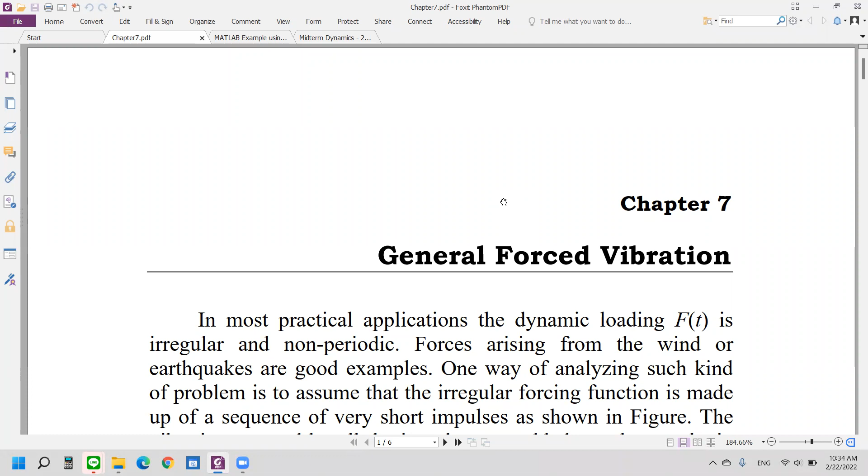You will learn with Dr. Chatpan, maybe, who uses direct integrations. They try to solve our system by assuming something, and it is more practical when engineers look at the system and say if the time delta t in this picture is delta tau, very small, they could assume the acceleration of the system is constant, or the acceleration of the structure changes in a linear behavior.

Such assumptions can be effectively implemented, and the application of direct integrations becomes much more efficient. I believe Dr. Chatpan will discuss this with you in the second part.

However, there is another way of thinking to solve this dynamic system. Many mechanical engineers, many aeronautical engineers, found something more efficient in the way they solve the system.

For example, mechanical engineers would like to know the vibration of the car or vehicle when it travels at different speeds on different surface roughness, or the irregularities of the street, road, or highway. They want to design the vehicle to have very small vibrations so the driver or passenger has a comfortable ride.

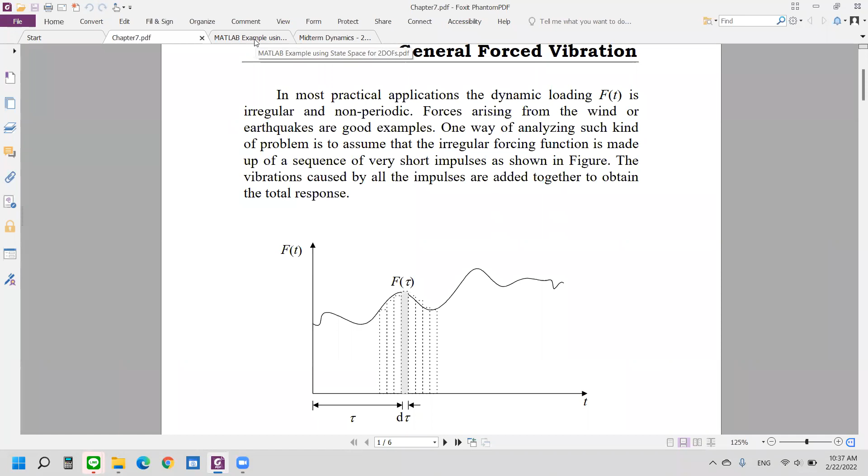And maybe this one - oh, I'm sorry, I cannot write down anything today since I have to use MATLAB, and I switched from the Surface tablet to my laptop, which makes it quite difficult to write. However, I think it's not too difficult for you to follow when I say state space.

I mean this - you can find it in the textbook, this file, by Professor Gary Hart and Professor Kevin Wong.

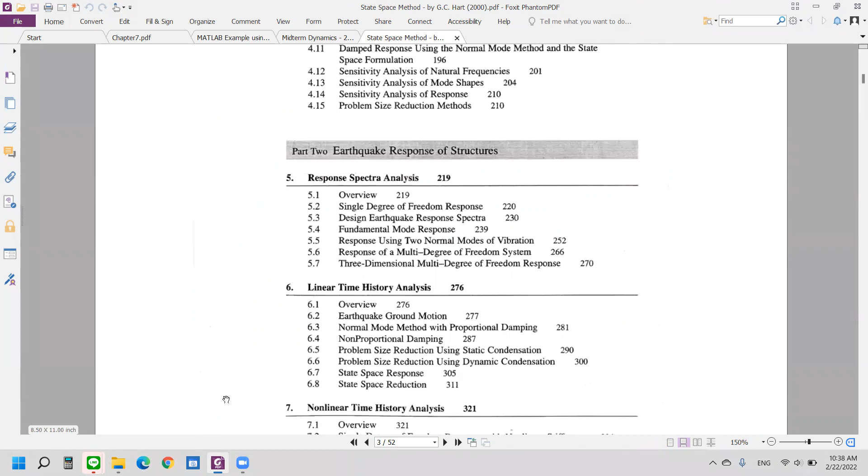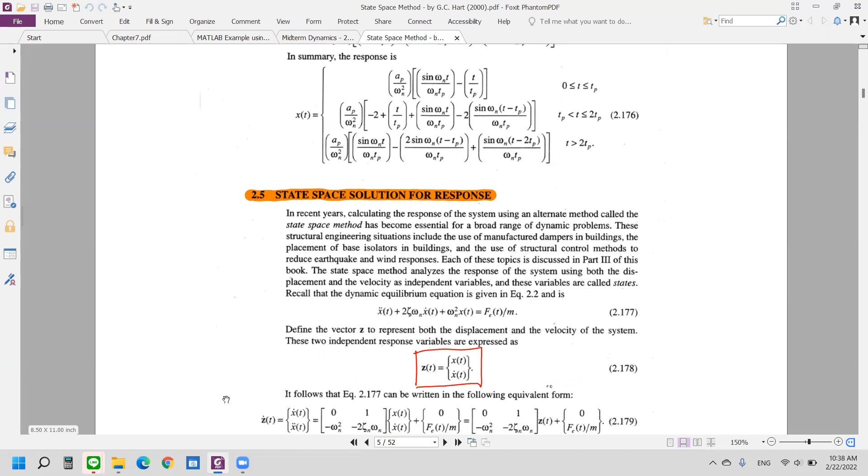The idea is the same as what's implemented in MATLAB. We try to solve the second order differential equations, and to solve them, they transform the second order differential equation into an equivalent first order differential equation.

So you see this is a single degree of freedom system here, equation 2.177. This is a single degree of freedom system. To solve this second order differential equation, they propose a new variable called z, a new vector containing x and x dot, as in equation 2.178.

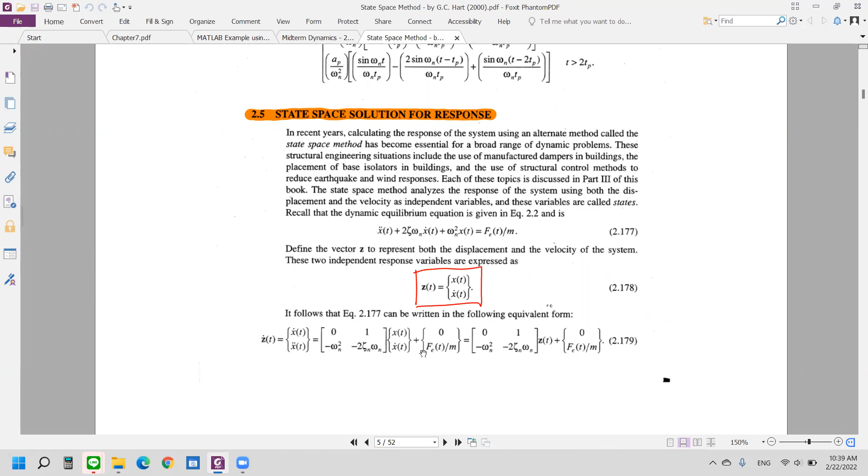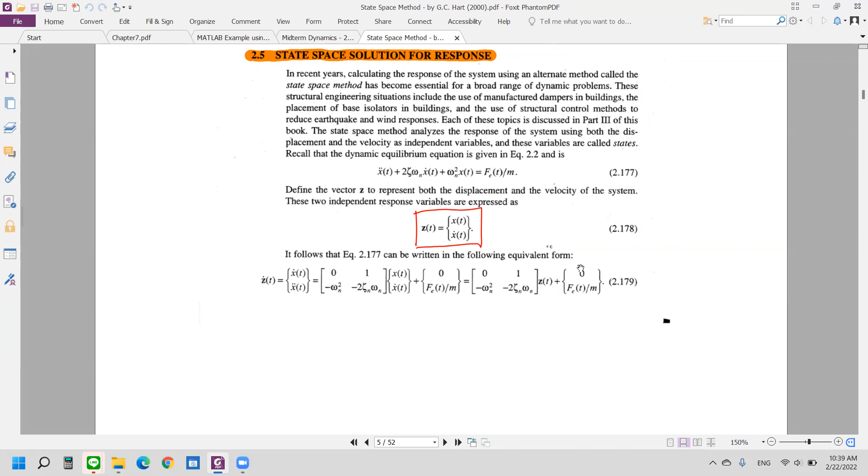Then you obtain this second order differential equation changed to the equivalent first order - it's first order because this is z dot, only one derivative on the new vector z, and on the right hand side you have a coefficient matrix multiplied with z of time t, plus the force function as in 2.179.

To solve that, they use this term - they do the integration as in equation 2.184, in which the effect of the initial condition is z0.

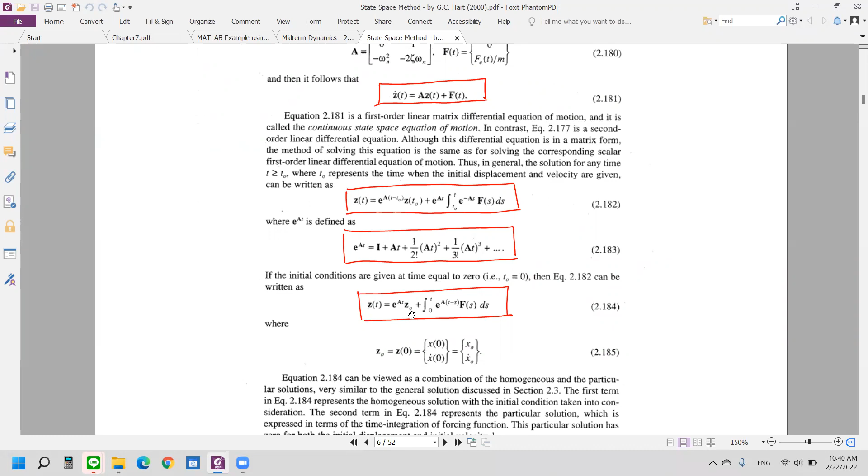Let me make it bigger. Okay, this is the initial condition contained in the vector z0. You have x dot 0 and x0 - that is the initial velocity of your system and the initial displacement of the system.

They multiply with the e to the power At. This is quite new to you, I believe. But if you look at the applied mathematics, this one is called the transition matrix.

And if I implement this in the computer programs, I can assume that the force F of s could be very small if I perform the integration. I will assume something like if the delta s is very small, the time step is very small, the force F can be treated as a constant function or just a constant quantity.

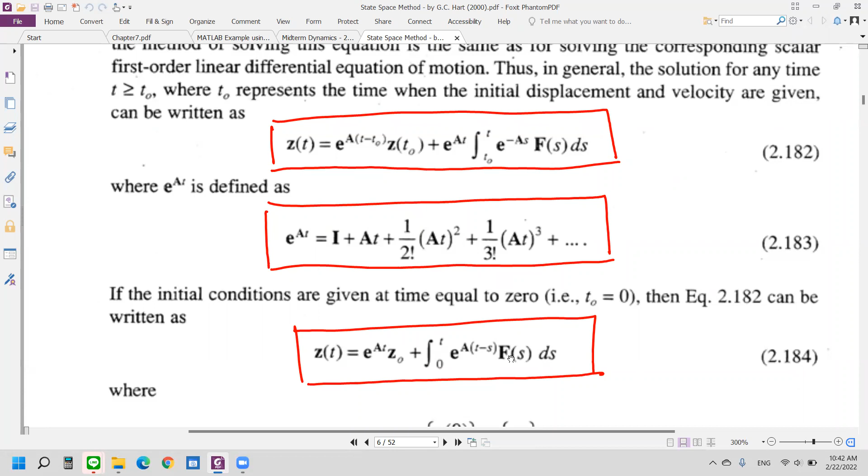So it's quite easy to perform the integration of this transition matrix only, even though the force is arbitrary. But when you perform the integrations, you can consider piecewise, you can consider each delta t of the effect of the force. So it can be assumed to be a constant force during the very small time delta t, like that.

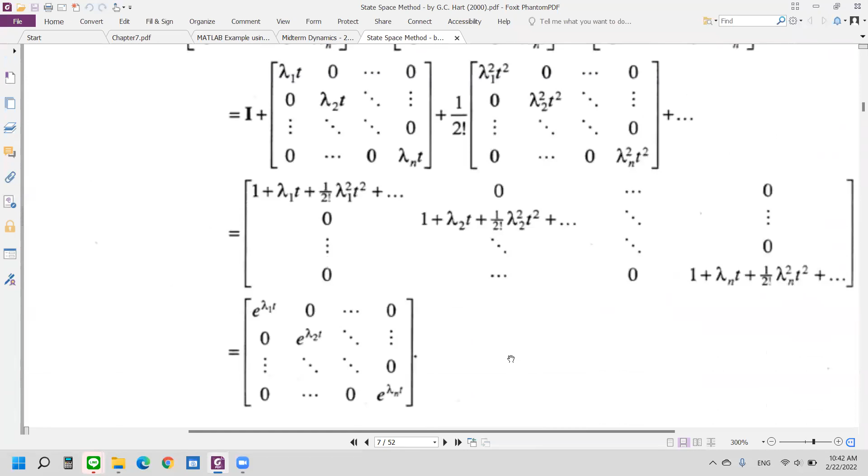Let me find a way. Okay, this is the way they compute the transition matrix. Let you, okay, maybe this one.

If you want to compute the e to the power At, what you have to do is get the eigenvalue and eigenvector of the matrix A, and the eigenvector in this textbook is a T matrix, a big T. This is an eigenvector, and the lambda here, maybe there as well, is the matrix of the eigenvalues of matrix A.

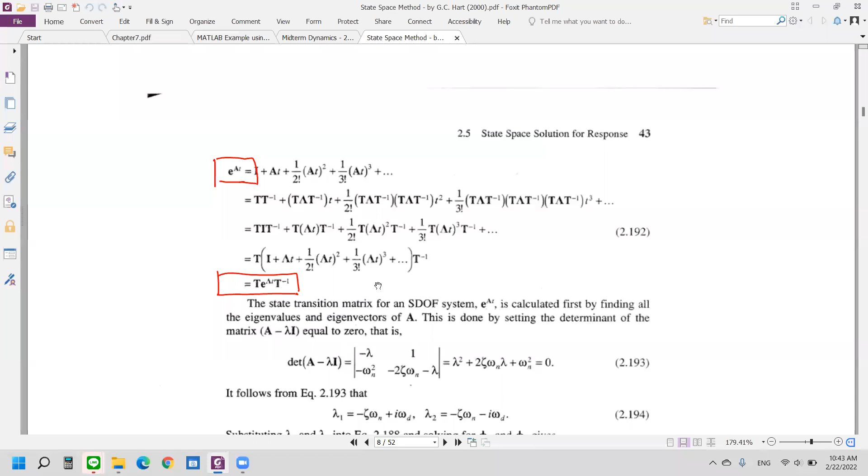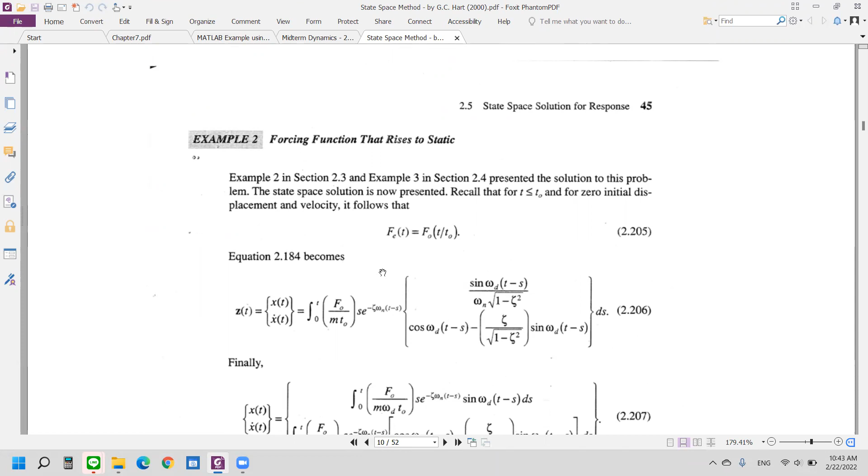And in MATLAB there is a function to get this transition matrix, very simple. I will show you later, but if you want a good background or the theoretical background of this state space, please come visit and understand through this part of the textbook. It could be very helpful.

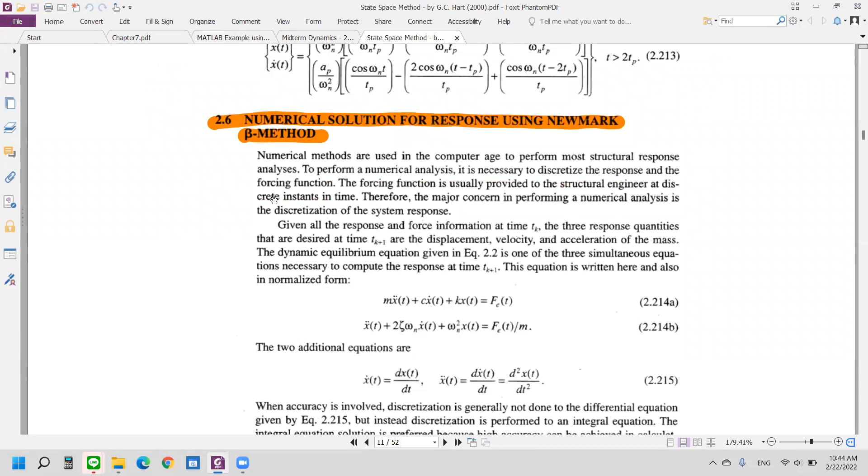Okay, this one is a Newmark beta. This is another idea that Dr. Chatpan maybe will discuss with you, so I skip it.

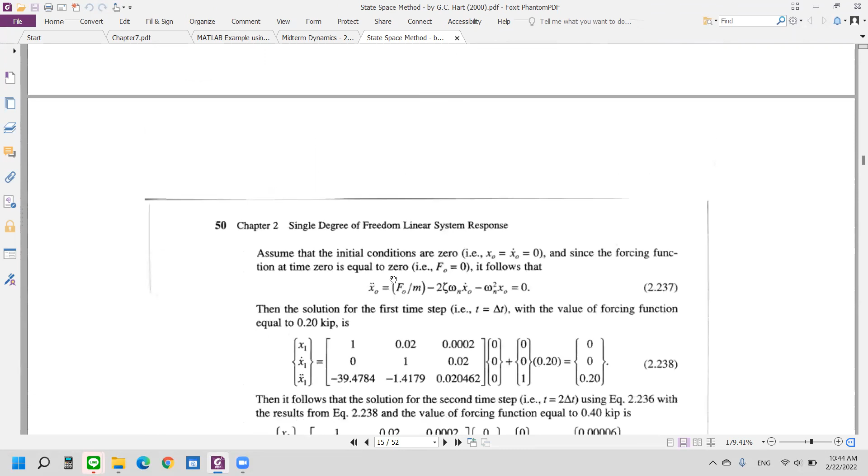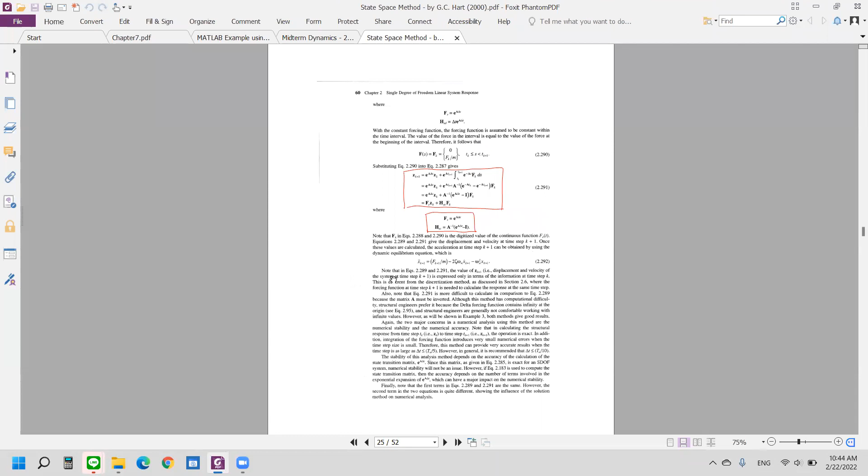It seems only the state space that I will show you today. Maybe should be. I want to find the iterations equation. Where's the iterations? Let me do this for you.

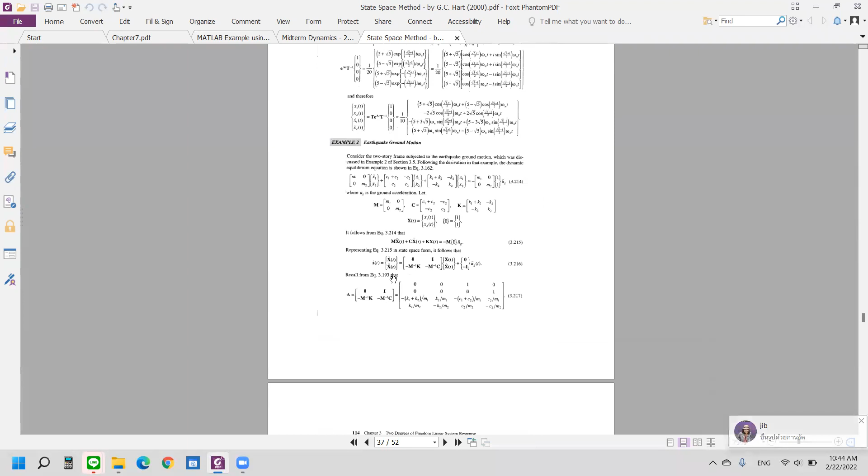Not so sure whether we have, okay, maybe here. No, it's still the integrations. Okay, this one.

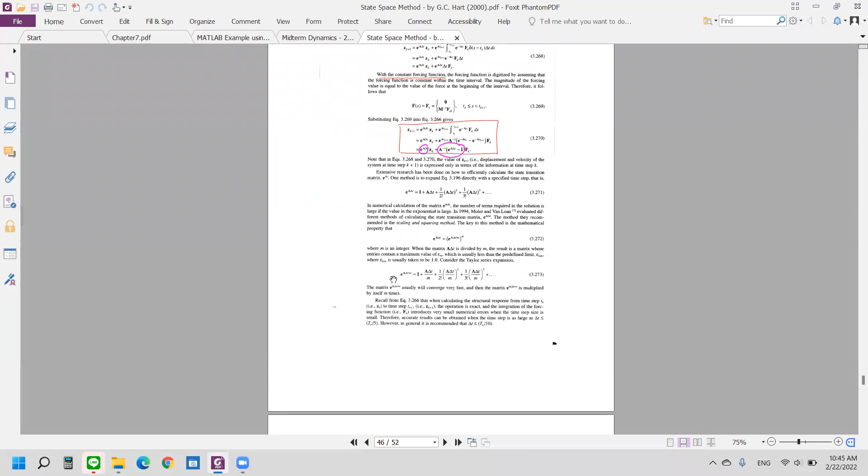The difficulty when we implement these algorithms, this equation, into the computer is that if you want to compute it at any time t, it could be better to go stepwise. You go step by step, starting from time 0 and go to time t equal to delta t.

Go to time t equal to 2 delta t. Step 3 is 3 delta t. Step 4 is 4 multiplied with delta t, something like that. And the efficiency of the computations will come if I can make use of the previous information. For example, to compute step number 4, if I can use the result from step number 3, it could be very helpful, right? It can help me shorten the computational time I need, because only small additional information is required.

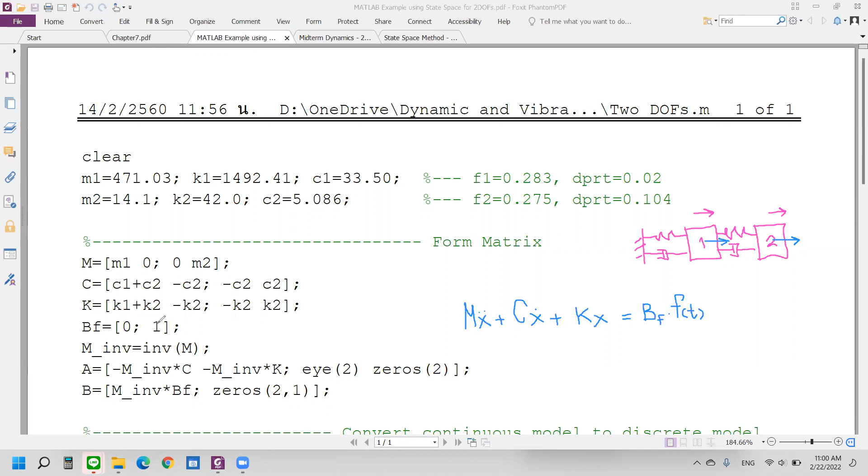In this example, let me do it like this for simplicity. Then I do the inverse of the mass.

And this is the A matrix, right? When you write down the state space, it's something like this. You can think about the state space in which if I write down the new variable Z dot, it could be something like this.

And the Z contained inside is what? It's X and X dot, right? This one, I believe you can remember, is called M inverse, M inverse, and then matrix C, something like this.

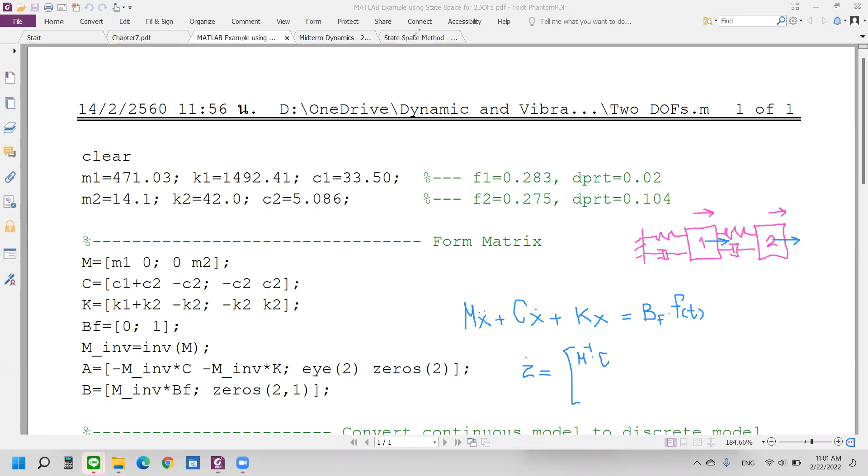Let me go back a little bit to when we do the equations of motion, okay, you can have this. It's going to be something like Z dot equal to, but in my case I use the velocity and the displacement. In this example, they use a displacement vector followed by the velocity vector, so it becomes a little bit different, right? In my case, I use X dot first and come after with the X vector.

So the matrix here could be minus M inverse C here, and I would get I there, and at this position it's 0, and at this one could be something like minus M inverse K, right? So the position of the elements of matrix A could be different between this textbook and my example. Sorry, it could be M inverse C, M inverse K, the I is I, this one is I, and 0. Okay, and then this one, this is the state space.

When I tell MATLAB about the delta t, then use this function c2d. But remember, if you want to use this function c2d in your MATLAB program, you need to have what they call the Control System Toolbox. Without installing the Control System Toolbox, you cannot have this function c2d.

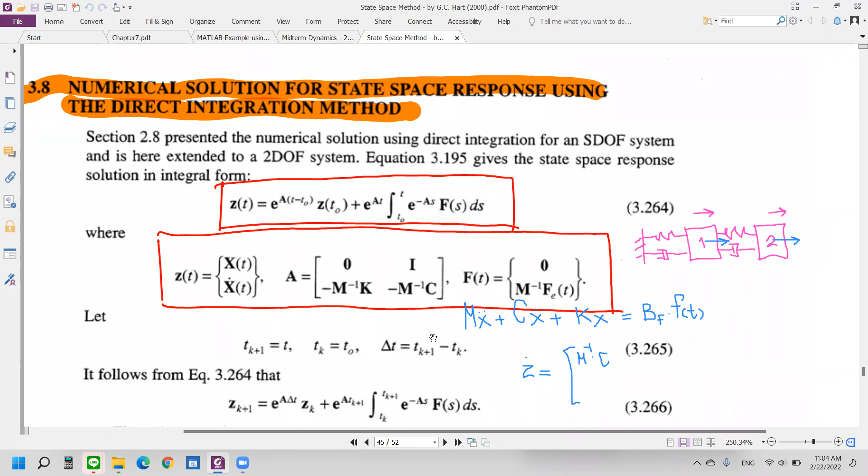To solve this equation, I need this transition matrix. Now it will be the matrix A sub D, and this one is going to be B sub D of mine. So A discrete and B discrete.

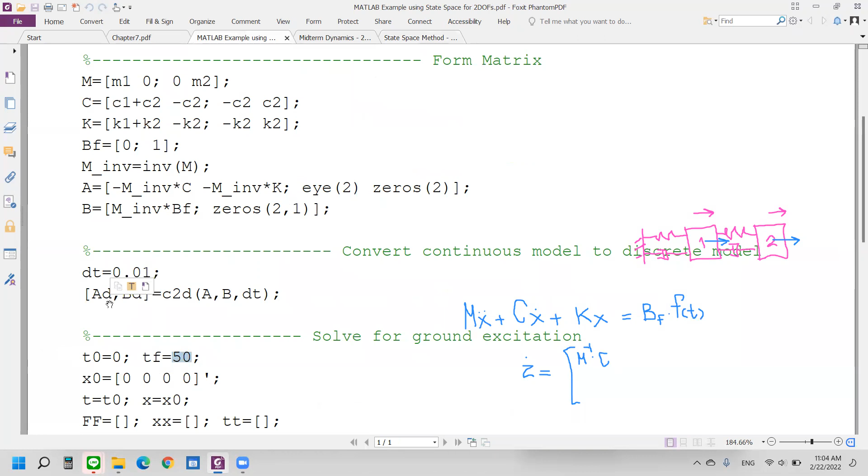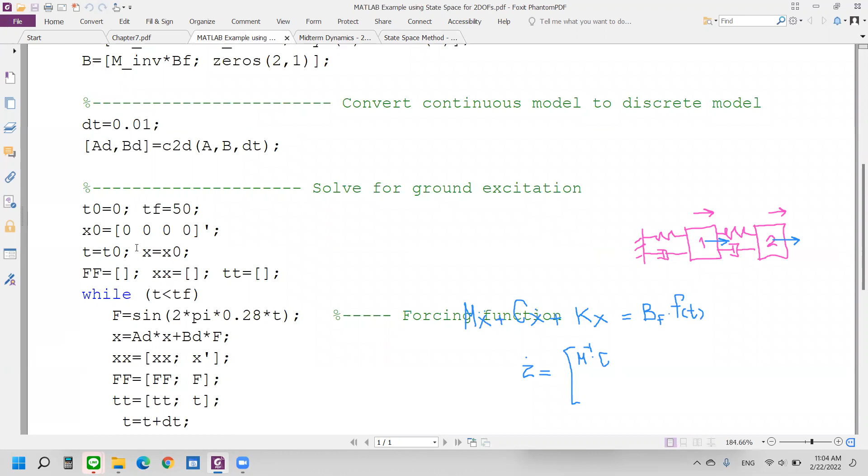So I have this AD and BD. I will solve from time 0 to 50 seconds and assume the initial conditions of my building are 0, 0, 0, 0 - no initial conditions, right? And this is just the vector that I want to use to store the result. This is the force vector.

My force, F, is a sine function. So it looks like I apply the force as 2 pi times 0.28t. The frequency is 0.28 hertz on the building, but only at the second degree of freedom. Remember, coming back to here, since the BF, we put 1 only at the second degree of freedom.

And then this is just the multiplications. To get the solution is very simple: I put AD multiplied with X, and BD multiplied with F. This is a time loop, a while loop.

In each loop, the time t is defined, and delta t is very small, defined as 0.01. So I will compute at each step of time, starting from time equal to 0, and increase by 0.01 at each step. Then I compute the present force and predict the future one step ahead using this equation. After I obtain X, I will use X to augment it into the total solution XX.

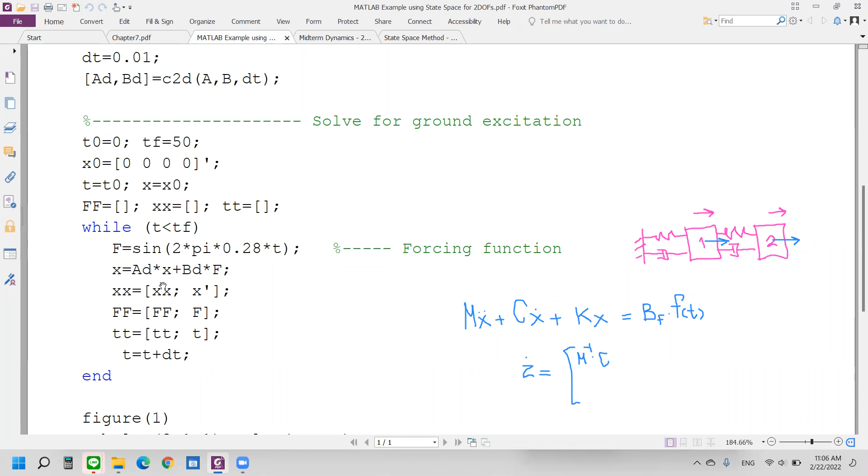And this is about the force - I will store X, and I will store the output of the force and the time t like this. Then I increase the time to the next step, t equal to t plus delta t. I continue this loop until t equals tf, and then my computation exits the while loop.

And I plot for you the force function, the loop, and the force displacement. So this is the main computation - this equation, X equal to AD multiplied with X, and BD multiplied with F.

At each step, the X will be the present information about X, right? Will be put here, and then I will replace it with the new X for the next step. I will store X there, keep going like this. And this equation is exactly the same as this equation.

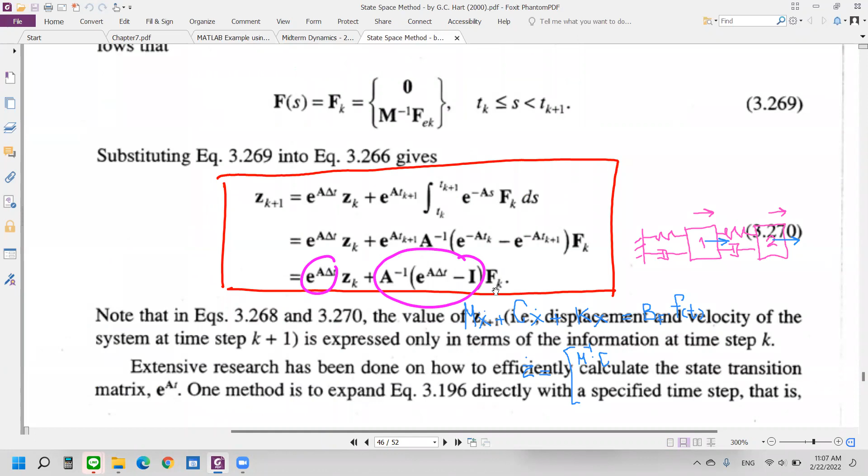ZK plus 1 equal to AD multiplied with X, plus b sub d multiplied with f - exactly the same equations. Let me do this for you in MATLAB, very short time I think.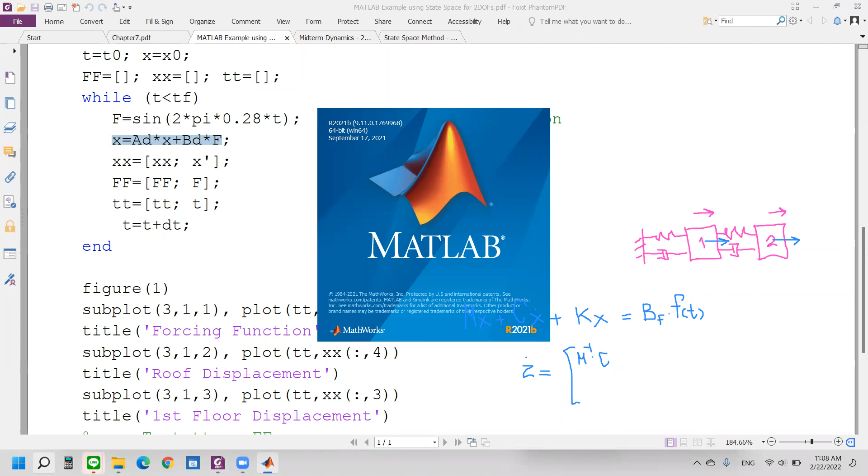Let me start MATLAB first. I have to test the program. It will take a few seconds to load the MATLAB program. Sorry for the time.

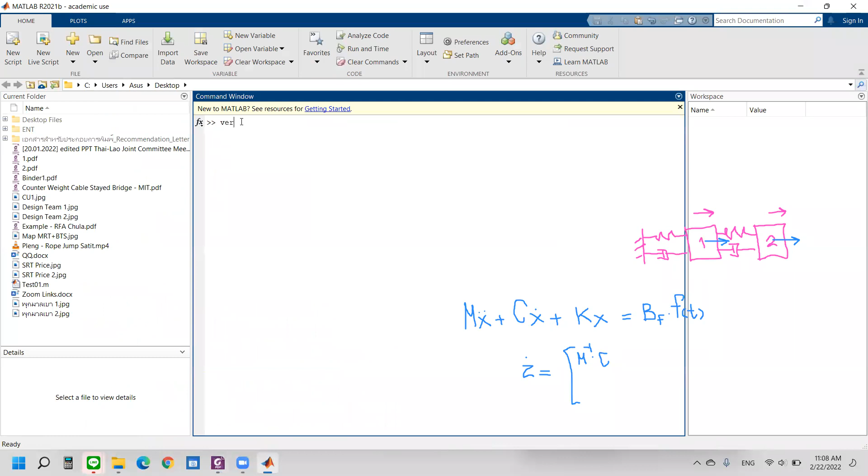Let me see the version I have. Signal processing - okay, this one, you need this. If you want to call the function C2D, you need this signal processing toolbox.

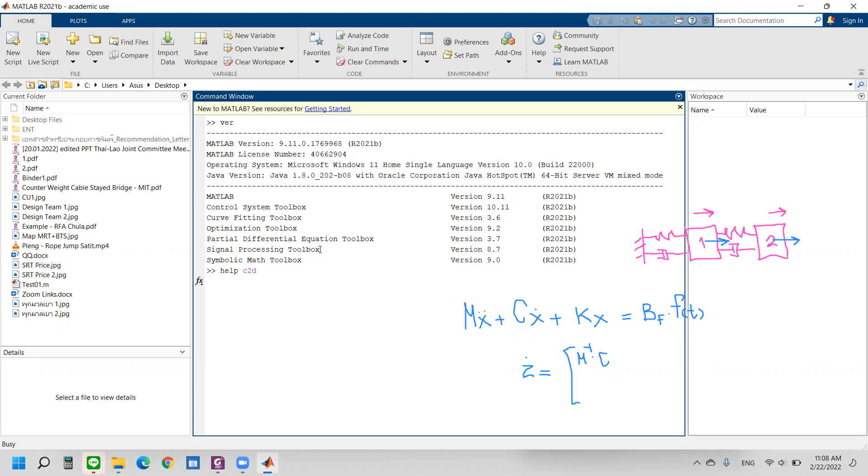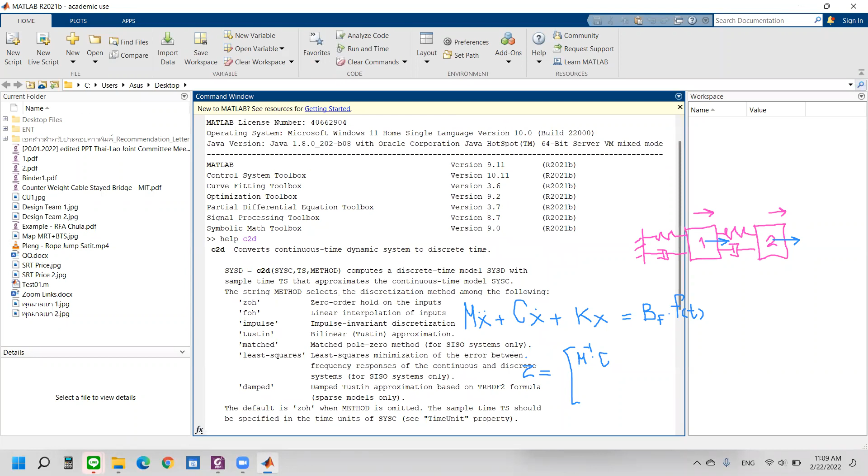When I do like this, it means I convert a continuous time dynamic system to discrete time. It's very simple - it's already built into the MATLAB program already. So let me do the script for you.

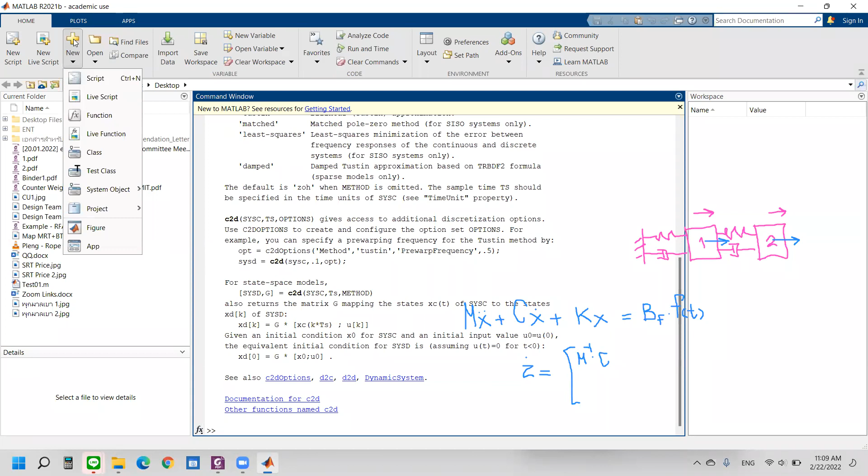Try the new one. Can you see my screen? You can now see MATLAB, right? Yeah, Ajahn, I see. Okay, now I change to the PDF file that we discussed before.

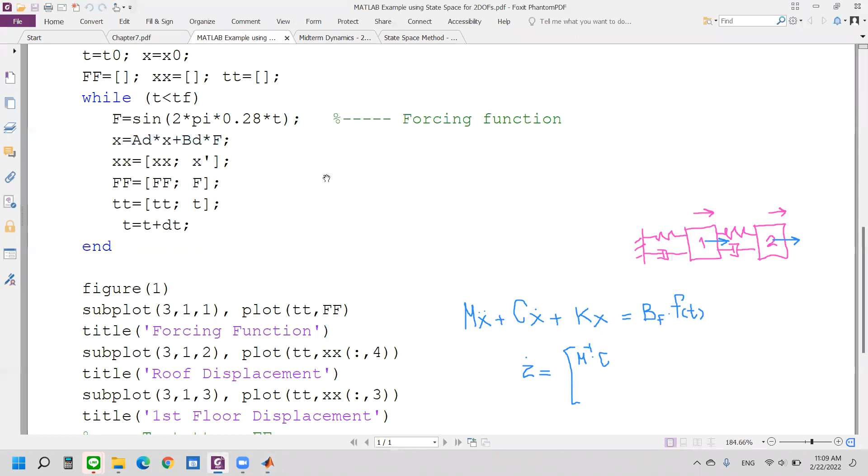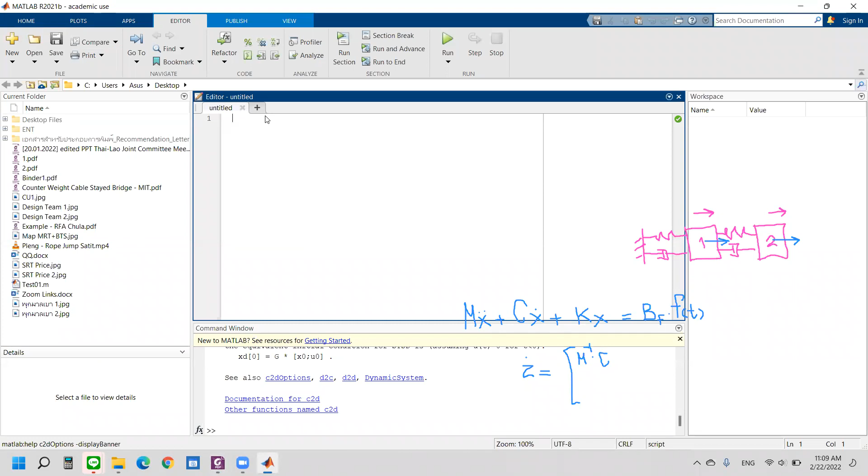This is a script of my file. Let me copy it for you and put it on the script. Remove the comment. Put the forcing function, the roof displacement, the first floor displacement. Okay, this one we also need to be okay. I have to save first, I think.

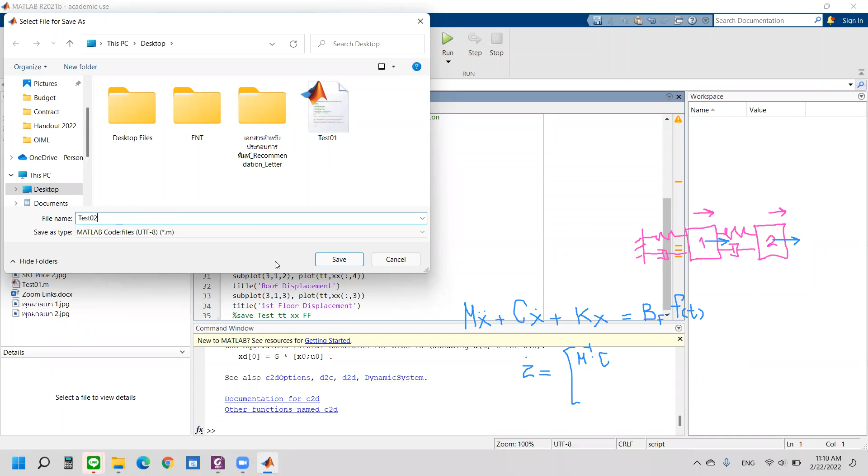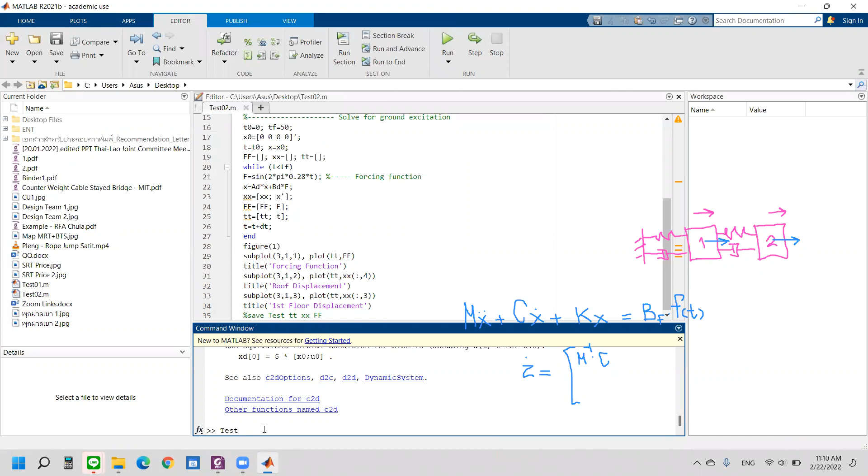I just tested number 1. Why don't I do test number 2? Oh sorry, it's number 2. Okay, the file is called test02, right? Then I just click on test02 and press enter.

Now you obtain the result. You see this?

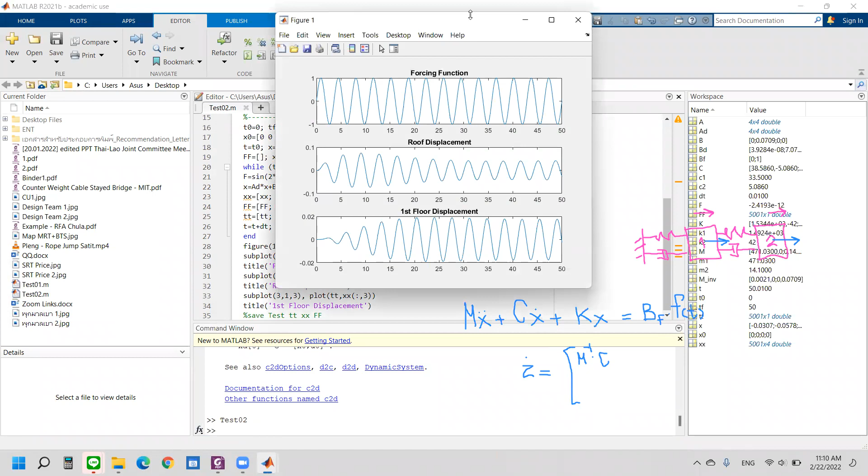This is the first function I apply. It's a sine function. The frequency is, as you know, 0.28. This is the frequency of the first one. The result shows the roof displacement and the first floor.

We have only 2 floors now: the first floor and the roof displacement. I'm sorry that the scale is not the same. The roof displacement is at 0.1. What is the peak? It's over there maybe.

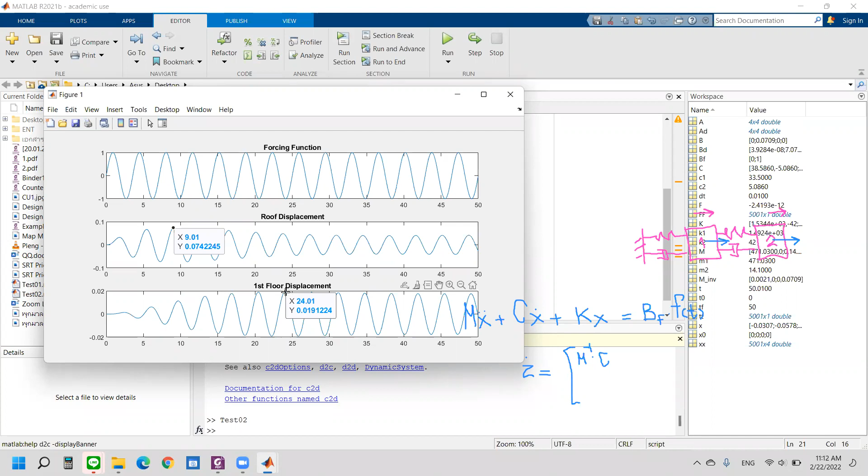It's about 0.07, maybe you're thinking about 7 centimeters maximum. The displacement of the first floor, maybe here at time equal to 24 seconds, is only 1.9 — about 2 centimeters maximum. Okay, something like this.

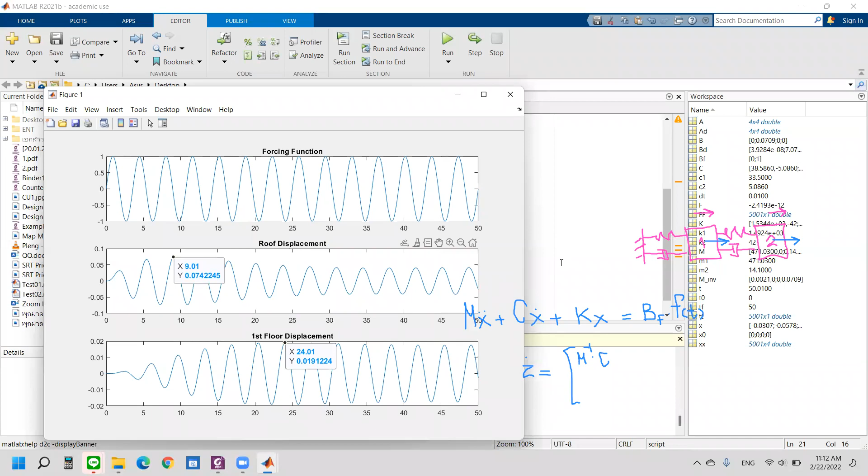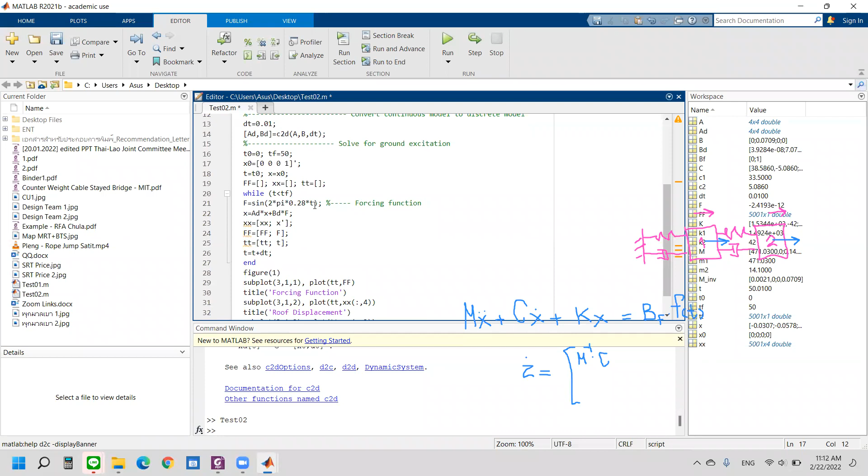If you want to test the free vibration, it's very simple. If you have this type of code, for example, I want the displacement of the roof — let me do the displacement there, moving the roof 1 meter, and I want to see what the free vibration of this two-vibration system will be.

Let the force equal 0, so I multiply with 0. There's no force acting on this building at all — only the initial displacement of the roof equal to 1 meter would be applied, and I would like to see what's gonna happen. Then I save and run the script for you.

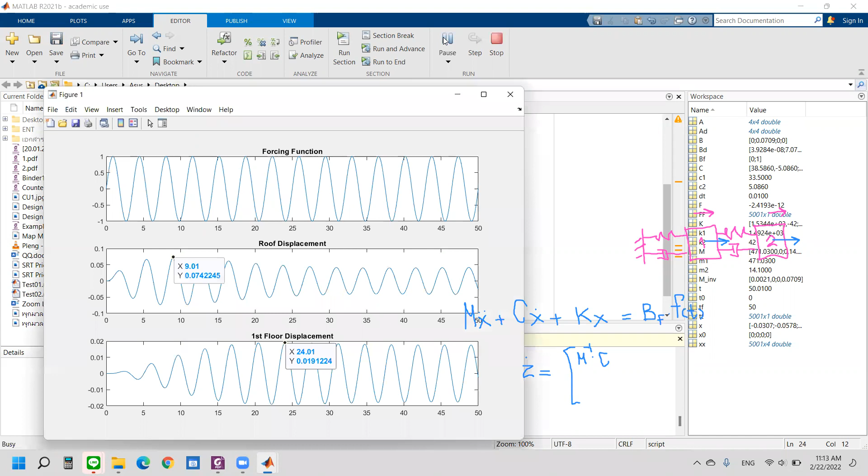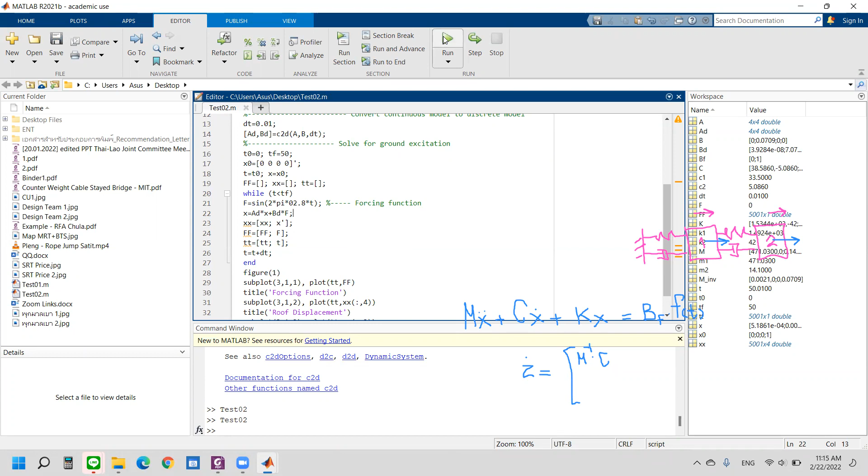Okay, if you want to change the frequency of the force, what I have to do — let me change the initial condition back to 0 again. And if I try to apply the force at 0.28, then change the frequency to maybe 10 times, let me try with 2.8, something like this. It's a very high frequency, 10 times higher than before. Let me save and execute the script again.

You see, now even though the amplitude of the force is the same — let's assume the amplitude is 1 Newton, the same force applied to the building — the displacement at the roof is now 10 to the power minus 3, and 10 to the power minus 4 at the first floor. So the displacement of the building is gonna be very, very small.

As we learned in the forced vibration chapter, about harmonic force vibration: if your beta, the frequency ratio, is very high, you can expect the DAF to be close to 0, very small too. That's why I cannot induce vibration in the building when the exciting frequency is rather high compared with the natural frequency of the system or the building itself.

Even though this system has 2 degrees of freedom, it follows the same rule. The behavior of the multi-degree freedom system will be explained and discussed with you again by Dr. Chatpan, so I'll skip this part.

Okay, that's all the information of the first part that I would like to discuss with all of you. I would like to end my discussion of the first part here, and I hope this information is helpful to those who would like to study the dynamics and vibrations of structures.

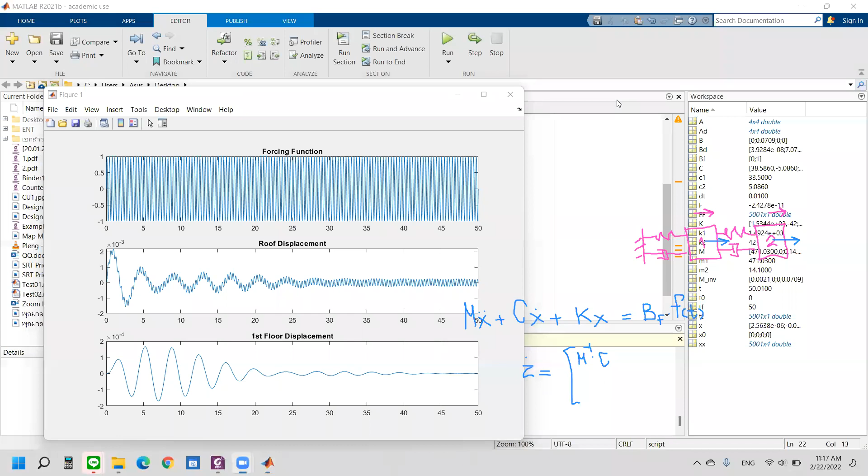Ajahn, is the exam closed book or open book?

Oh, in the exam, right? I will discuss the exam with you. If you don't have any question on the issue we discussed so far, why don't you start with the previous exam first, and then I will explain what I expect to have in the exam this year, and then you're welcome to ask me again about the exam. Okay.

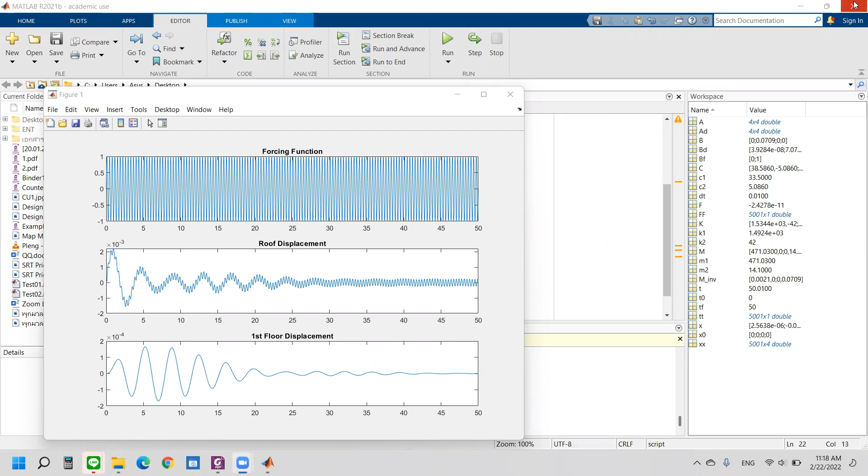Let me try to stop this one first. Close the MATLAB. Okay, I have this file for you, right?

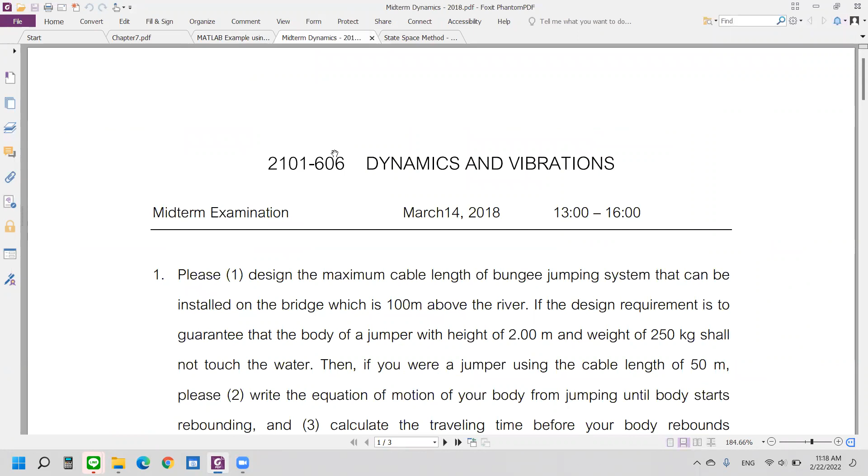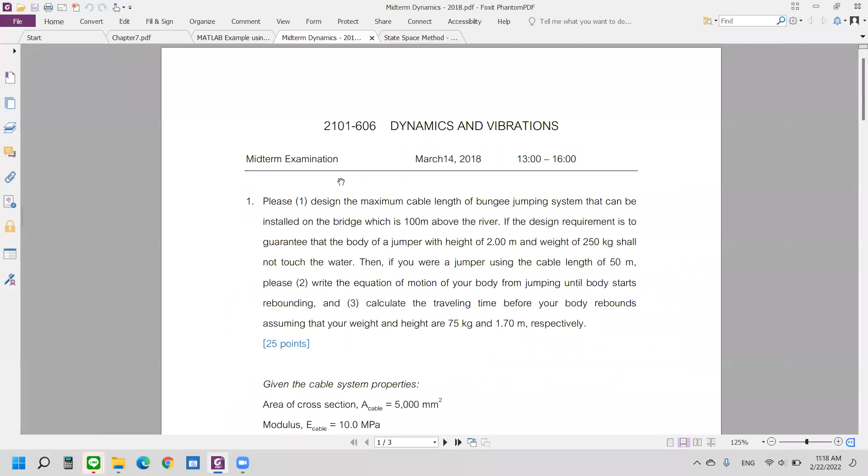This is a previous exam. The exam will take like 3 hours, right? And we already made an appointment on March 2nd, am I correct? In the afternoon, starting from 1 o'clock till 4 o'clock. Am I correct, everybody? Right, March the 2nd, okay? If you don't have any comment on that, I assume all of you realize about that already.

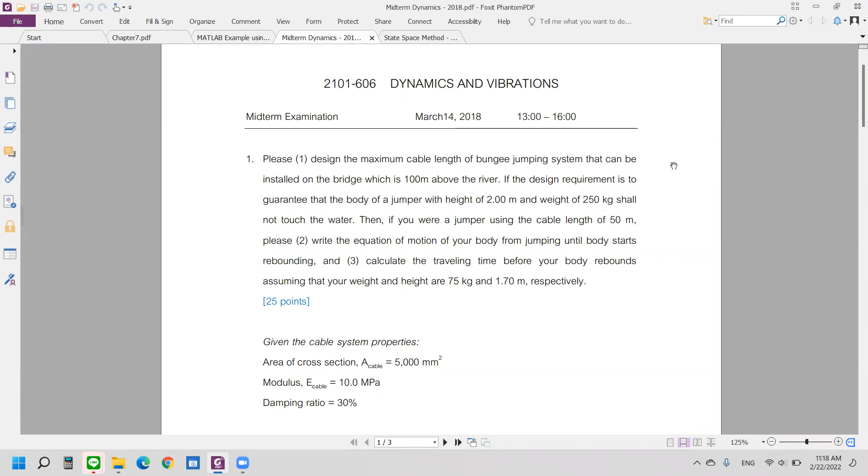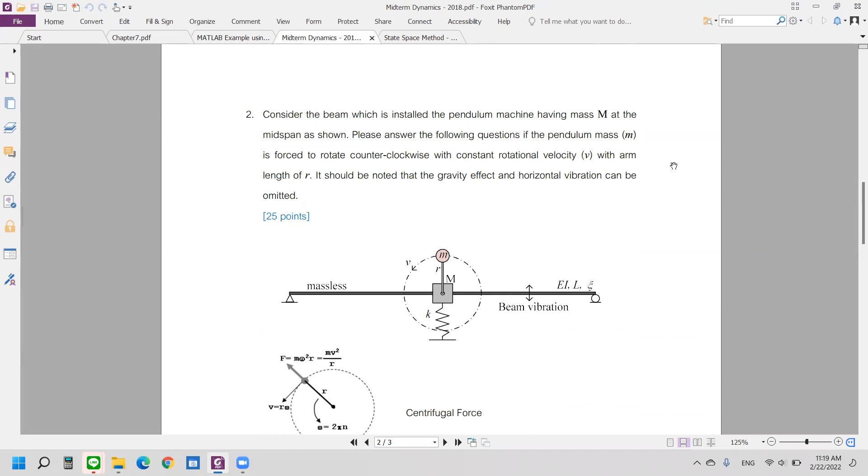And in the exam, how many questions will I have? 3 maybe? Yes, I already had 3 questions that year. And this year I will do rather the same, so you can expect about the same amount of questions in the exam this coming March.

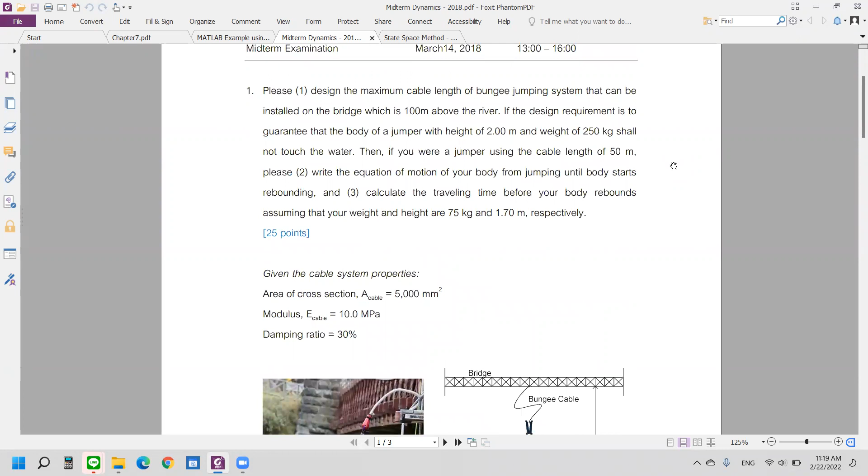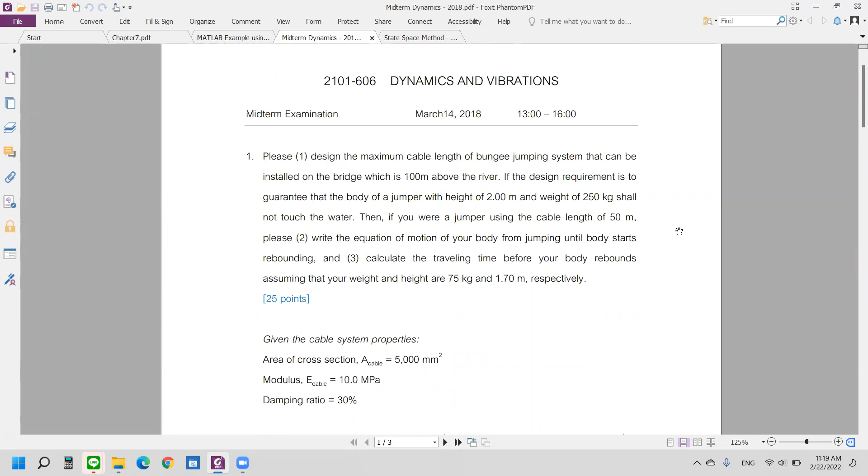I think the first question is about free vibrations, where I ask my student to calculate something. For example, number 1: design the maximum cable length of the bungee jumping system that can be installed on the bridge, which is 100 meters above the river. Okay.

It looks like they call it the bungee jump, right? The jumper is standing on the bridge, and they have the rope or cable, which has rather high elasticity and strength to carry their body. Once they jump to the river, we expect maybe the hand finger can touch the water, but not the body. So we have to decide the length of the cable, where the requirement is to guarantee that the body of the jumper, with a height of 2 meters and weight of 250 kilograms, shall not touch the water.

Okay, so the target is very clear. After jumping from the bridge, your mass comes down to the river according to Earth's gravity. The speed starts from 0 for sure, and then gets faster and faster during the falling of your body. Once the cable length runs out and comes straight, then it becomes active. The cable will act as a spring and bring your body back to the 0 position, right? So the question is you have to compute the initial velocity and the displacement where the cable will become active, so that I can stop you before you touch the river.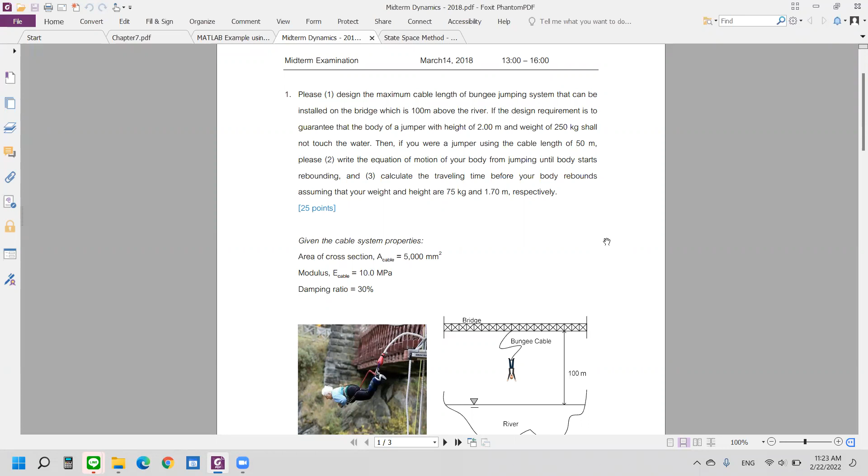The second question: a beam installed in a pendulum machine having mass m at the midspan, as shown. Please answer the following questions if the pendulum mass m is forced to rotate counterclockwise with a constant rotational velocity v with arm length r. It should be noted that the gravity effect on the horizontal vibration can be omitted, so the beam at the starting point is assumed to have no deflection at all, because we don't care about the gravity of the earth. Then the mass is attached at the midspan, and it's assumed that the beam is massless, having the properties EI, L, and damping.

The small mass m is fixed to the big mass M, and it keeps rotating counterclockwise. So you can imagine the vertical component of the force - it's a kind of centrifugal force, you know about this one, right? The force is M multiplied with V squared over R, something like this. This is the centrifugal force, and I provide you also the information of this physics.

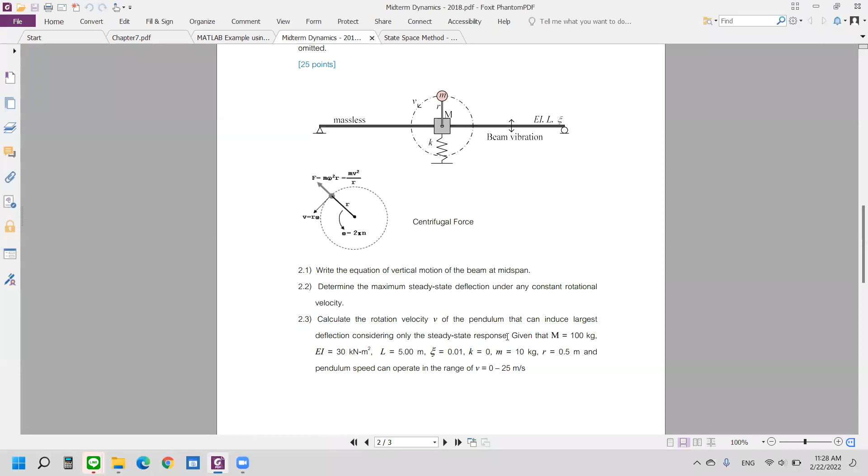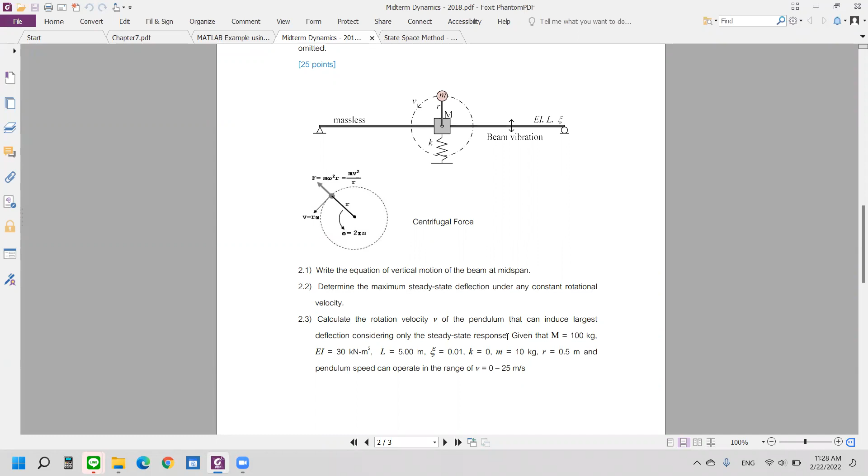Your solution from 2.2, where or when the pendulum velocity will produce the maximum deflection of the beam, if the speed or velocity of the pendulum is bound within the range of 0 to 25 meters per second only. So that's not so difficult - let you do this job yourself, try to solve that one.

And number 3 is quite straightforward. I think I only provide you one example of the single degree of freedom system subjected to periodic force vibration like this - this one is going to be chapter 5, maybe. In which the force F of time t is a kind of triangular function, periodic functions.

So what you have to do is very straightforward. You have to convert this force function F of time t, replaced by the Fourier series, right? You need the sine and cosine series to help transform this force function to an equivalent one - another force function that's a combination of sine and cosine. Using that Fourier series, you end up with a summation of force components of many sine and cosine terms.

And then you just apply the harmonic force vibration knowledge to compute the response of your building. I expect there could be one point here, which is the truncation assumption. I would like to get from you your answer on when you will stop your computation, since the force function, even though converted to the Fourier series, contains infinite terms - terms from one to infinity. I would like to see from your answer what would be the good assumption for an engineer like us to stop our computation when the frequency is quite high compared with the natural frequency of the building.

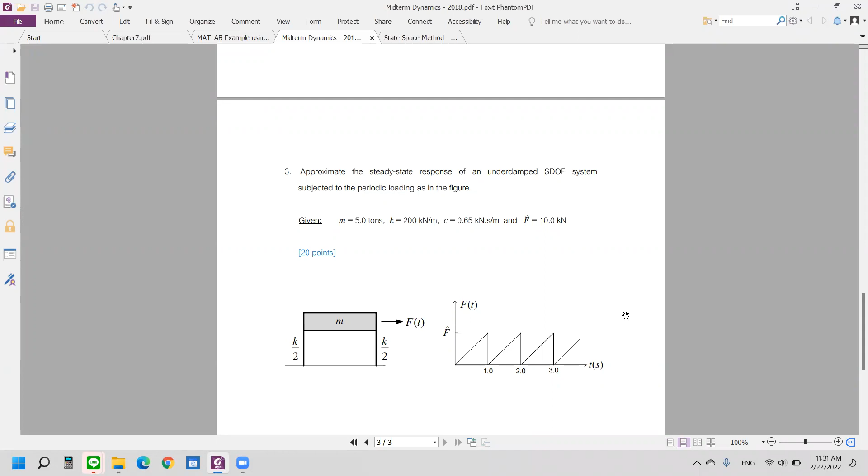You consider the effect of what they call the beta parameter - look at the beta parameter, the frequency ratio beta. You can say something about the truncation, and then compute only the first few terms and obtain the total solution. That is what I expect to get from my student from question number 3. And that could be all, right?

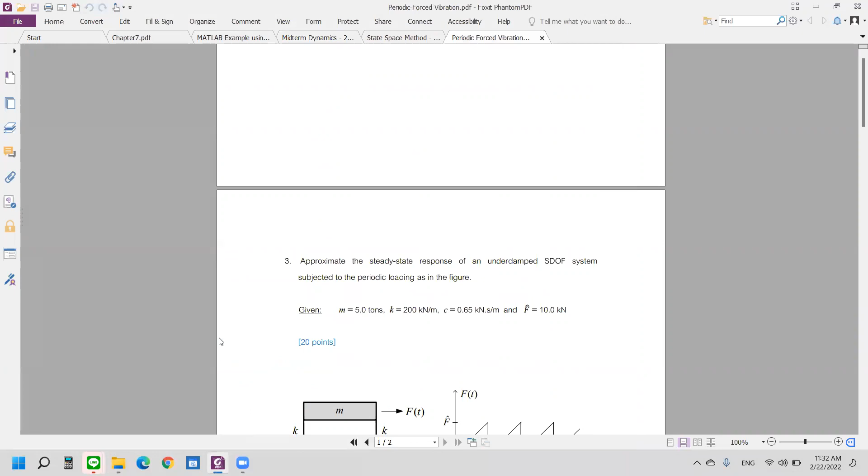Ajahn, can I ask you about a sample for Fourier series? Fourier series, why not? Okay, example. The Fourier series, what you're talking about here, maybe. I don't know, let me find it for you. This one? Yes, right, okay. On page 2? Page number 2.

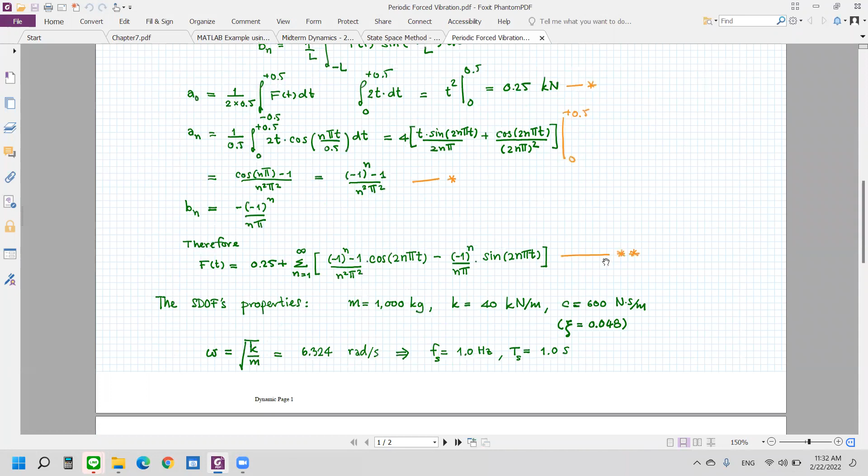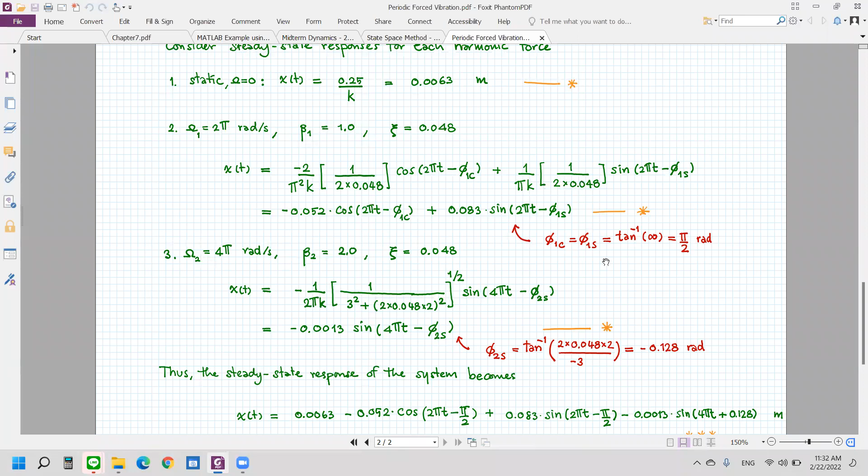Where is it? What's the meaning of phi 1c and phi 1s? Oh, you're talking about the meaning of the subscript here? Subscript, yes. Okay, maybe number one, I would like to refer to the component one, right? Like the big omega one.

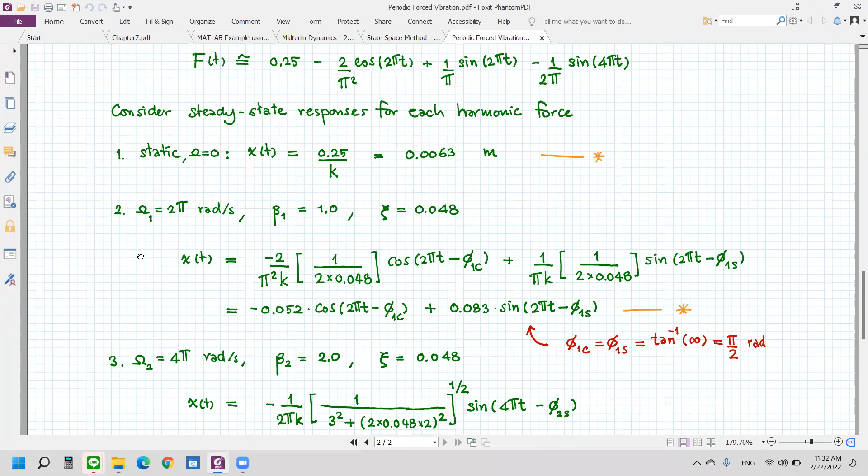Remember, your force function contains many frequencies. In this case, you have 2 pi and you have 4 pi, right? As the big omega. The big omega 1, I mean 2 pi. And big omega 2 here, I mean 4 pi.

It's a different frequency. To obtain the response of this big omega 1 component, the term here, I believe, comes from this one, right? It's a cosine of 2 pi t minus phi 1c and phi 1s. And if I understand myself about the expression of this, I believe that c comes from cosine and s comes from the sine function. Understand? Okay, professor, thank you.